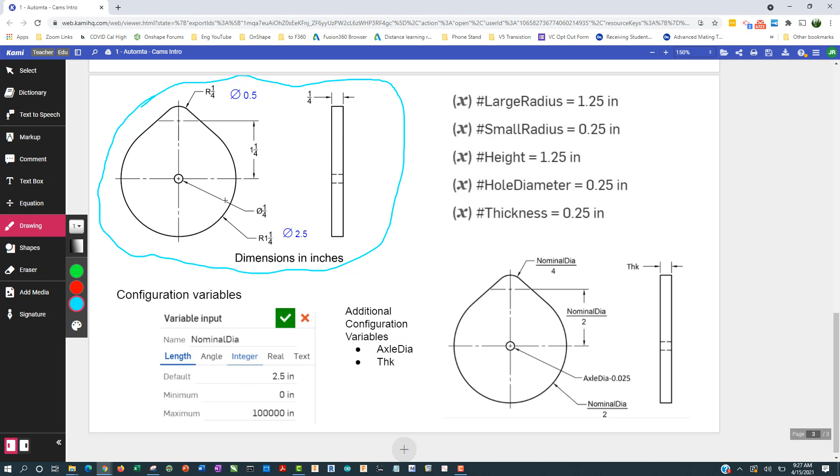The way we're going to make it is with a large circle down here of diameter 2.5, which corresponds to a radius of 1.25. Then we'll have the circle above it of diameter 0.5, which corresponds to a radius of 1/4, and we'll separate it by 1.25.

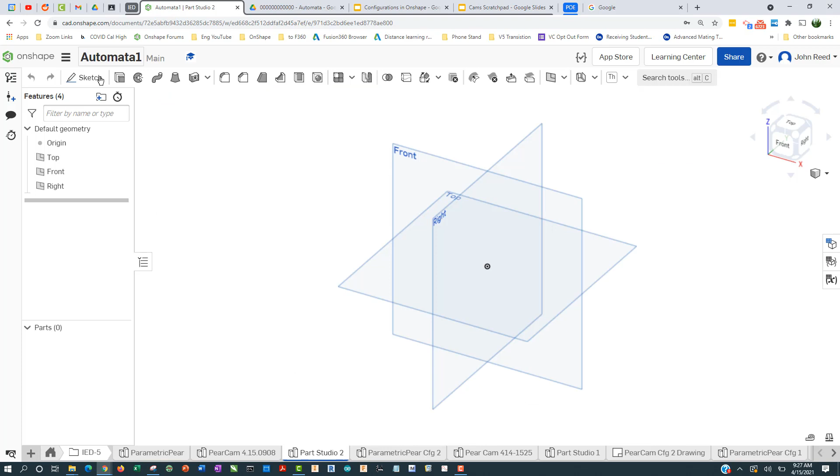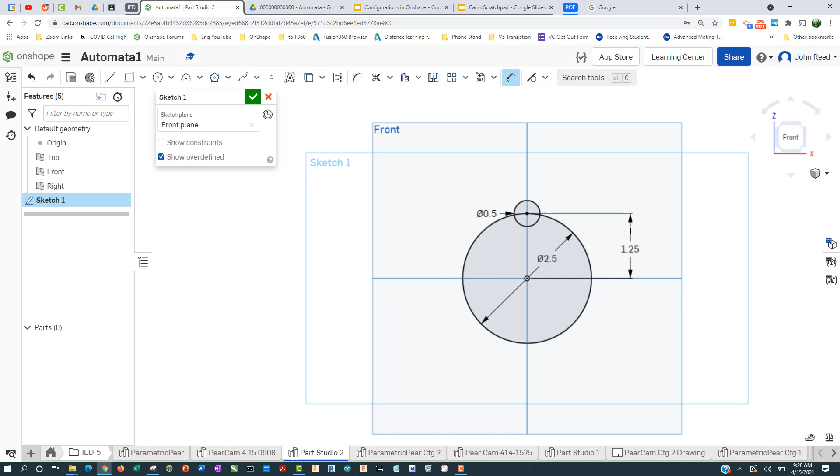Let's start. Put a sketch on the front plane and put our circle here, diameter 2.5. We'll put another circle directly above, diameter 0.5. Then the distance between the centers of the circles is 1.25.

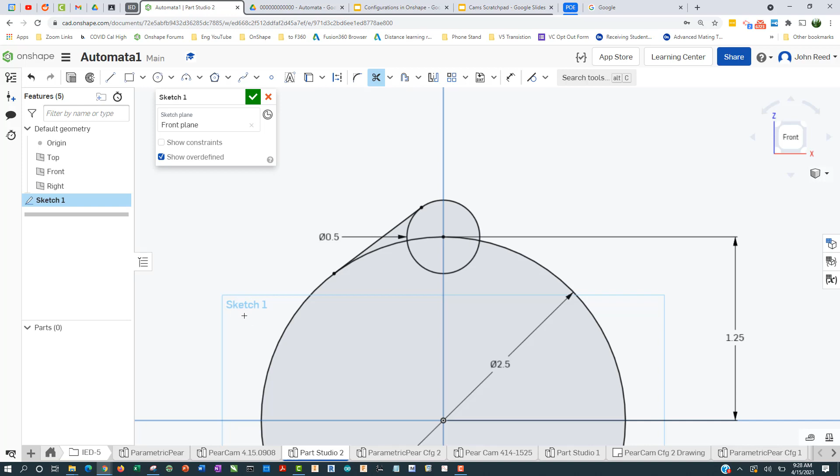Now what we want to do is put a line right here to here. Let's do these one at a time, since Onshape can be fussy about this. We're putting this line here, and we'll make a geometric constraint so the line is tangent to those circles, then trim away the stuff we don't want, which is outside the circles.

Let's do the other side now. We'll draw a line, and use the tangent constraint to go here and here, and here and here. Let's zoom up and get rid of the stuff that sticks out. Okay, so we've got the inside, it's all gray, that's good.

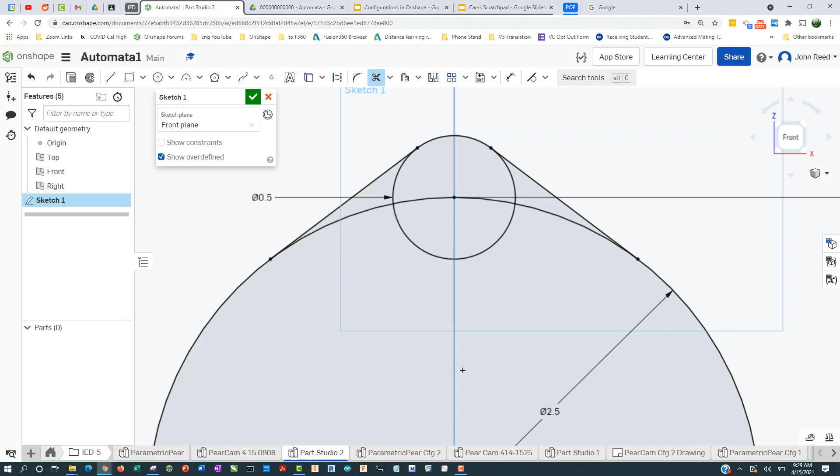Now we could extrude this without doing these next steps, but let's do it because it looks nicer. We're going to trim away all the interior extraneous lines, and sometimes Onshape complains if we don't do these in the right order, but it looks like I got it this time. So it's all black, that's important.

Alright, let's put the hole in the center. So that's our pear. The hole diameter is 0.25, and I think that's all I need right there.

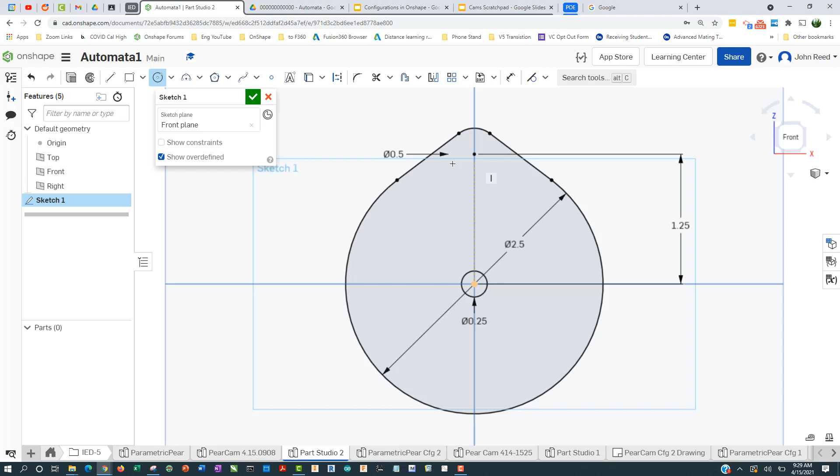But actually, what we're told to do here is, let's come over here. At this point, we're told to delete these diameter drawings, measurements. So click, right click, delete sketch.

And then redimension it so that we get a radius instead of a diameter. It looks like it's easier to make when we use diameters and circles, but when we're talking about it, we want to talk in terms of the radii of the arcs. So let's change it that way.

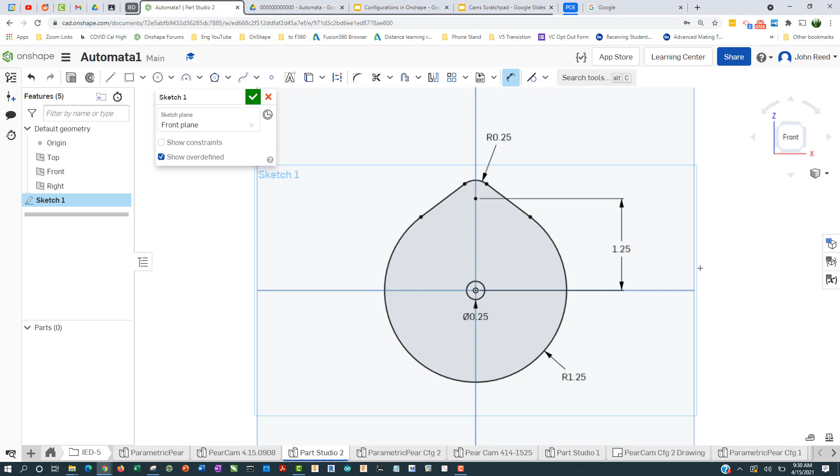Alright, I think we're ready to extrude. So extrude this way, and we'll make this 0.25. And Shift 7, and P to get rid of the planes, Shift 7 again, and that looks correct.

Now we're told that we want to use variables so we can potentially change this thing quickly. So we're going to define variables: large radius, small radius, height, etc. Come up here, variable, large radius, and that's going to be 1.25, I think. Is that right? Yeah, so we'll take that. Small radius is 0.25.

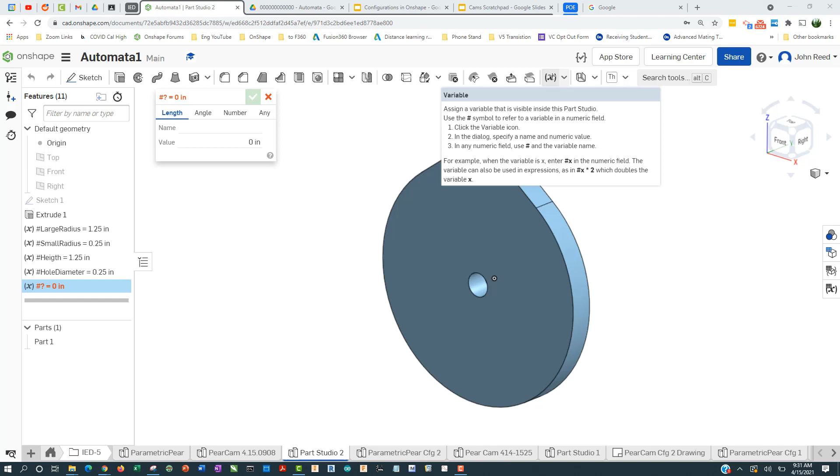Yep, and then let's do the height. Height, 1.25. And hole diameter, 0.25. Finally, thickness, 0.25. Alright.

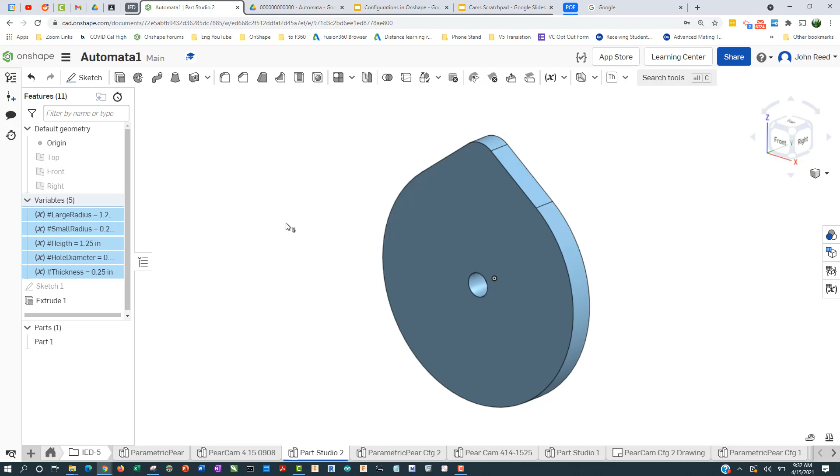Now we can't really use these variables until we have them above the sketch we're going to use them in, in the feature list. So I'm going to drag them up like that, and then hit folder and put them in and name it variables while I have those variables selected, and it'll nicely stuff them into a folder. Okay, now that I've got these variables, I'm going to double click on the sketch.

And I'm going to replace these numerical values with their variables. So this one I'll change to large radius. This one I'll change to small radius. This one I'll change to height. H-E-I, there it is.

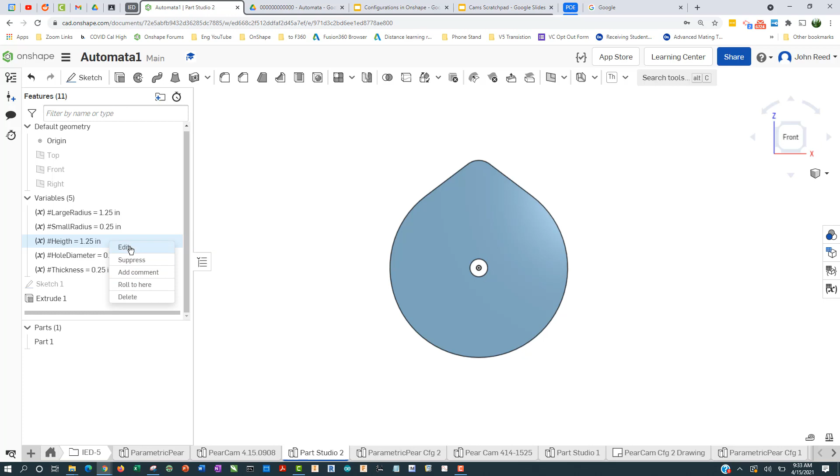That should say G-H-T. Let me go back and fix that. So I'll accept that, and then edit this one and call this HEIGHT. Okay, I'll go back into the sketch here, and now I can change this with the right spelling, HEIGHT.

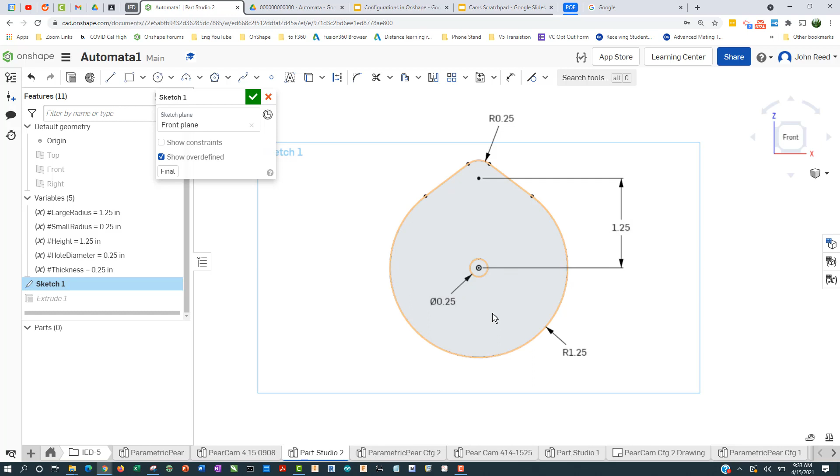And here, no, this one is going to be the hole diameter. I think I've got them all done, so I'll accept that. And then I'll go into the extrude and change the depth to thickness.

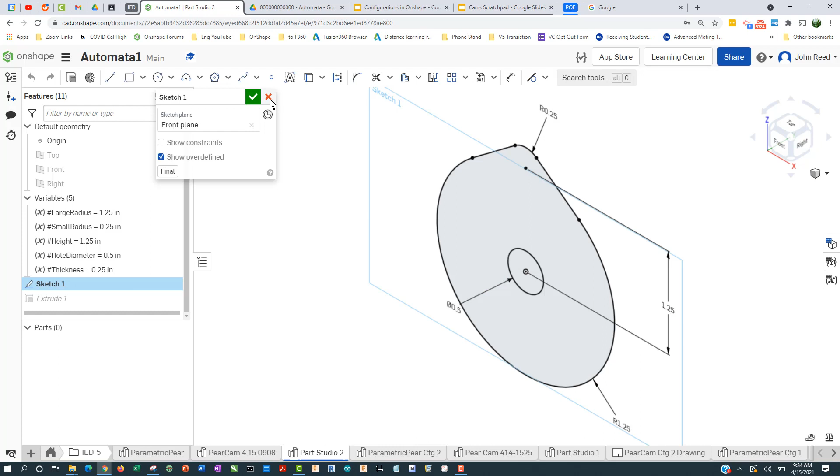At this point, I really haven't done anything other than maybe allow me to more easily change some of the individual dimensions. For example, say I wanted the hole diameter to be twice as big. I click it right there, 0.5, enter, and accept it. You can see it's much bigger. But I could have easily done that by going into the sketch and changing it. So it's unclear how useful that actually is.

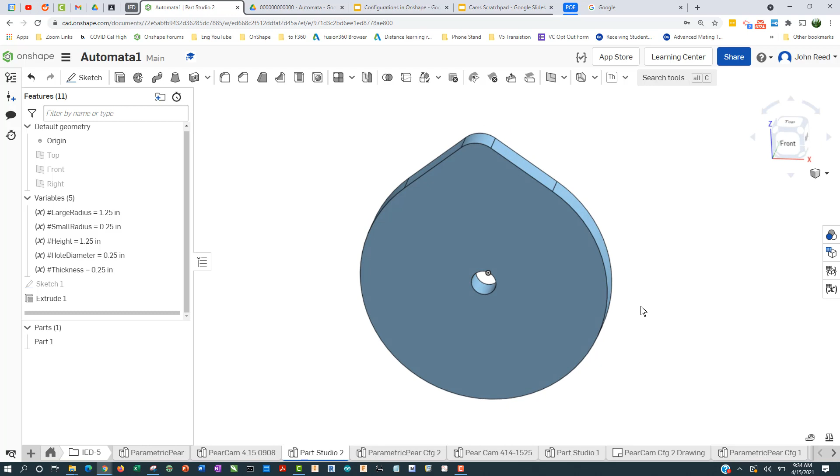But in the next video, when we talk about configurations, we're going to use these variables to help us figure out a way to change our Pear Cam in shape and size a little bit so we can tailor it to our needs. So we'll do that in the next video.